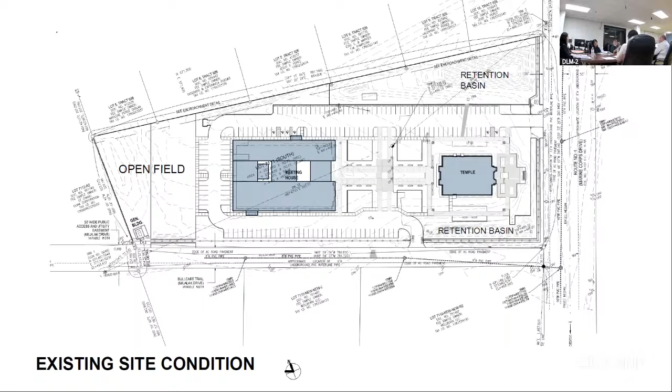And so what you see on the screen here right now is the area where patron housing will be located. It's a 2-story concrete facility, roughly about 14,700 square feet. Of course, that being said, all those facilities, we also need a grounds maintenance building, so slightly to the north of that is the grounds maintenance building.

And then we have security for the site, but right now the security guards are just sort of either in their car or sitting under one of the facility sheds. So we put a little guard check there at the entry to the site.

What we also did shows how committed and serious the church is to making sure the appearance of the site is presentable and aesthetic at all times. It's about fitting into the community and setting a good example. We are putting in a plant nursery because there's a lot of landscaping around the site, and they want a small nursery so they can propagate plants in case they need to replace damaged landscaping around the site. That was the intent behind it.

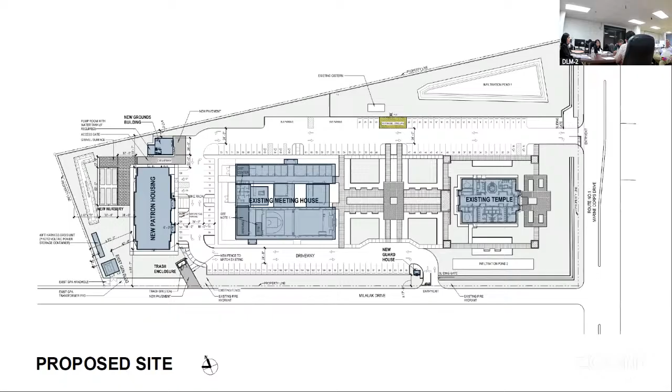We have enough space to do it there, but this is something we're also coordinating with GPA to make sure we meet all their requirements. So we're actively looking at that. The contractor and designers we're working with are familiar with GPA's requirements, so all of that has gone into the plan for this.

This is just a blow up of the utilities. Because we put the new patron housing on the back side there, it obviously offset some of the flow of the stormwater runoff. So we did put a small retention pond on the back side of the property, which is still tied into the main retention pond at the front of the property. You'll see that retention pond right there.

This just shows that we're connecting to a public sewer line that's going to be right there along Milalak Drive. That's more than adequate to support the facility in its current condition, so we're not looking at having to upgrade any utilities along that.

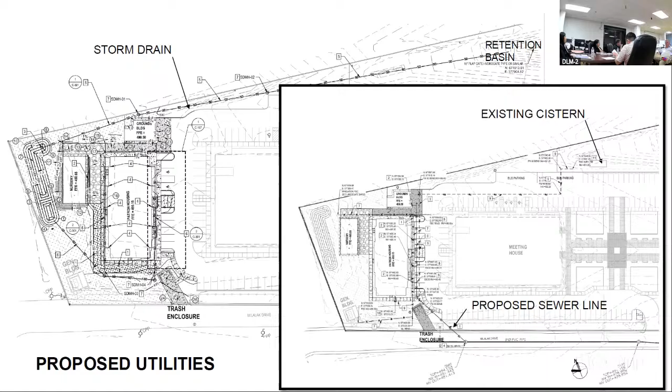If you have any questions as I'm going along, please speak up, you know, I might talk too much, but.

I just want to say also, here's a picture of the landscaping around the house. You can see we're actually putting a lot of landscaping around the patron house. The idea is that we keep it simple, but elegant and fun.

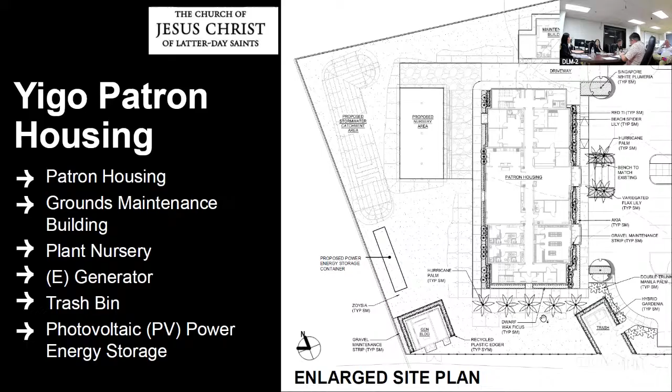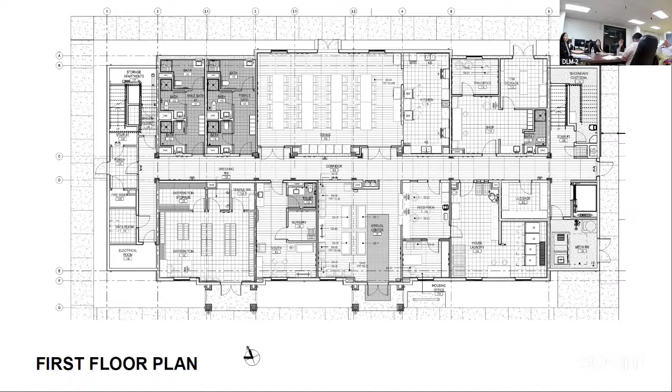This is a layout of the first floor. On the first floor, basically all the administrative functions are located. There's going to be a dining area there for use by most of the patrons, and we have a community kitchen as well. There'll be a small laundry room on the first floor, but other than that, most of the functions on the first floor are administrative.

On the next slide, the second floor is where we have all the sleeping quarters. There are about 9 sleeping units. 6 of them are dormitory style units with 3 to 4 beds each, and then there are 3 units set up for more of the durational staff.

What I forgot to mention is that this patron housing is going to be used for the members. It's never going to be rented. It's intended to be used by the congregation, members coming from the outer islands. Most of them will be here for 3 to 5 days, so they won't be here very long. The intent is that they stay for a short period, and we'll go back to focus on the actual application.

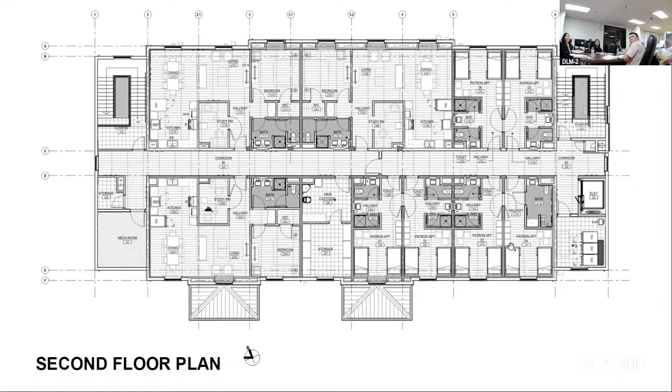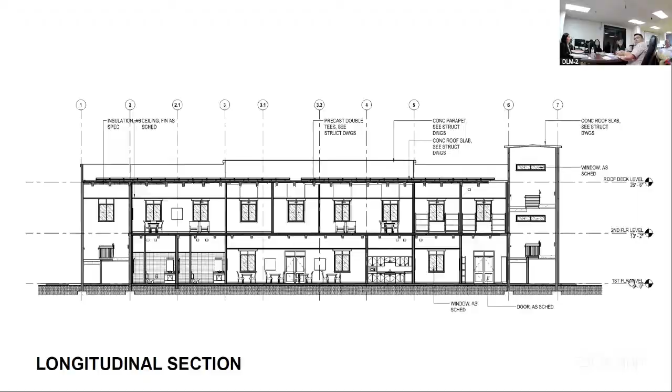Here is the building section, just to give you an idea of the general height of the building. We're well within the requirements for this building. And this is just to give you an idea of the property.

We did modify the parking requirements on this. We went back and looked at what the requirements actually were based on what was actually built, and we came up with a number of 118 parking stalls. So we actually left 128 parking stalls in there.

In addition to that, we added parking stalls for 2 buses. The buses are just there to drop off the guests and then leave and pick them up, as we do. So that's the intent for that.

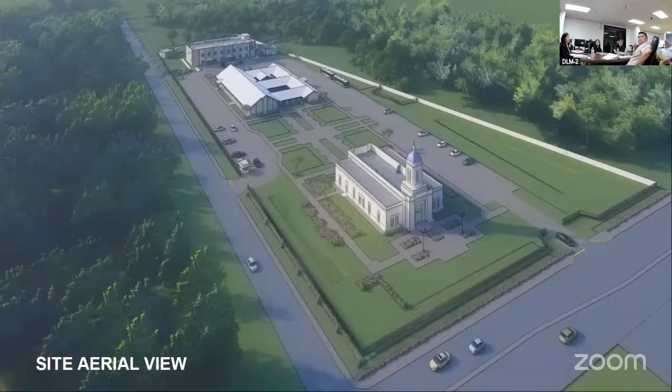Here's another view, the aerial view, just to give you an idea of the circulation through the site.

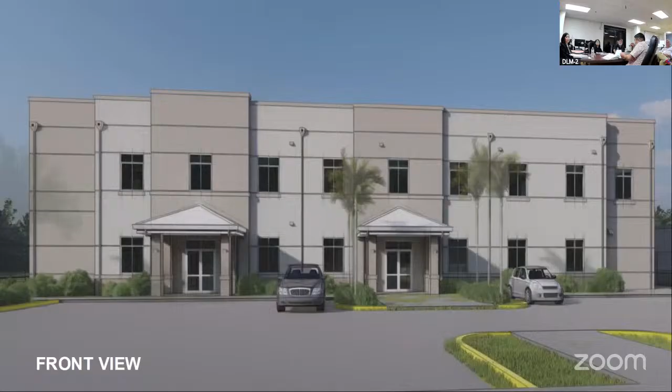This view, and then the next view, is how the building will look. It's definitely simple but modern — something that we felt good about.

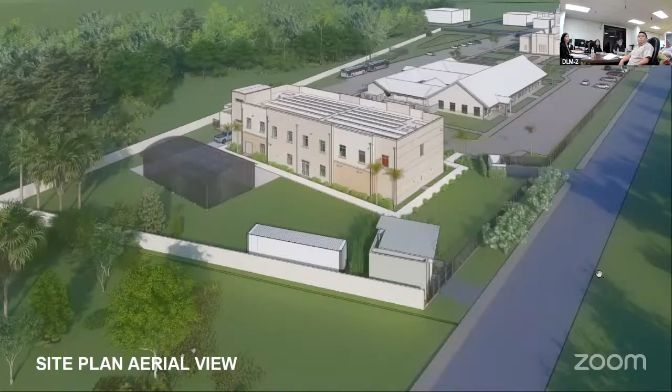And this is the same view from the front, from the northeast side.

Perspective there. With that being said, I just want to say thank you again for allowing us to present this to you. As you can see, a lot of study went into this before we even started this construction, so we did take a lot of consideration.

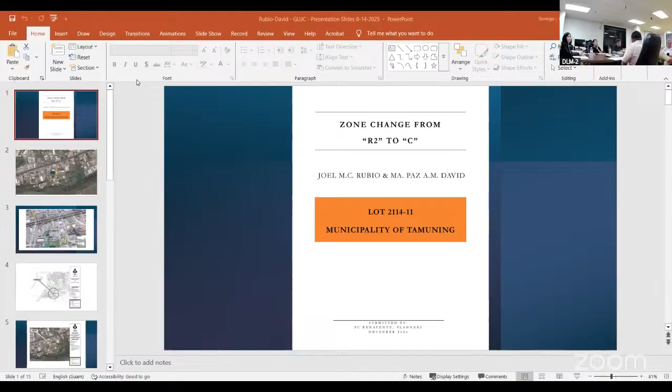I have a couple of slides we have. When the Land Use Commission approved the conditional use in 2009, there was a concern that the building may impede the natural flow of water coming down from the airport area. So the commission put a condition that there be a free space behind the building for water to flow through, and that was done.

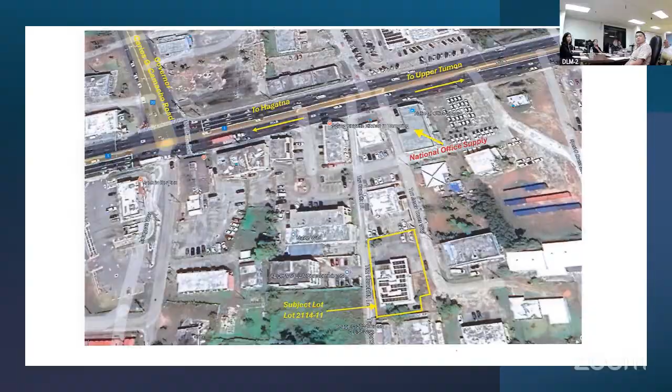Can we keep going? Okay, stop here. Can you zoom that in, please? On the back side of the building, you can see that bubble shape there. That's the space set aside that the commission required to allow the water to flow through to the back.

There's a chain link fence on either end, and water can easily go through. There's also a little space on the corner notch for water to go through. There's a ponding basin right on the bottom side of that black structure of the building, and those rectangles on the upper part of the site plan are percolation trenches.

The parking spaces on the right side have a pattern. Those are pervious bricks that water can flow through. So they've taken a lot of consideration regarding the water in the design.

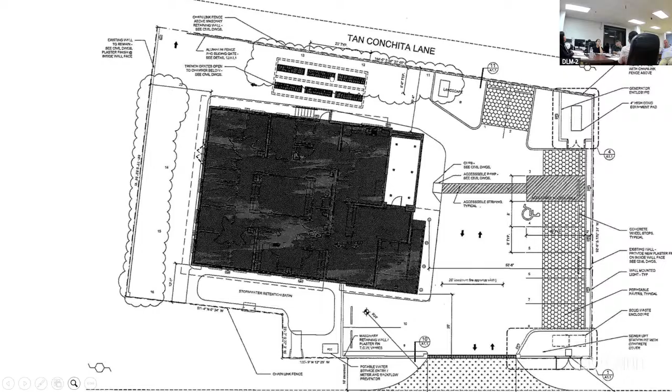So there's space for the water to flow through the back. The ponding basin is on the low part right there, and they've included percolation trenches, and the parking spaces are pervious surfaces where the water can move through.

So Commissioner Brennan, the applicants have addressed it in terms of the commission's requirement regarding stormwater flow and not blocking any existing stormwater. So they put that in place.

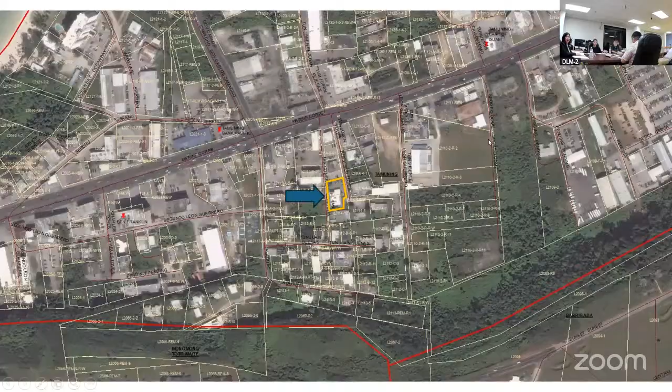Thank you, Madam Chair. I'll be reading the staff report dated August 1st, 2025. The site is located along Tan Conchita Lane and Tun Jose Tovis Way, approximately 288 feet from the junction of Route 1, with a lot area of 14,854 square feet.

The site is presently developed with an existing health clinic facility and its accessory elements occupying the entire site. The master plan designation was mixed use, and under the community design plan, the designation was commercial.

Previous commission action included a conditional use application for a medical clinic facility, which was tabled by the commission on September 24, 2009, and another conditional use also for a medical clinic facility that was approved with conditions on November 12, 2009. The application was accepted on February 14, 2025, heard by the ARC on March 6, 2025, and a public hearing was held on June 4, 2025.

On to discussion and staff analysis. The applicant's request is for a zone change pursuant to section 61630, in which the commission may change the zones established whenever it finds that public necessity, convenience, and general welfare justify such action. The applicant, in response for the zone change, submits the following justification.

Relative to public necessity, there has been an increase in military buildup construction projects, with some of these major projects awarded to local construction firms. These projects require professional architectural and engineering expertise to develop new building construction plans, modifications, or renovations to existing buildings.